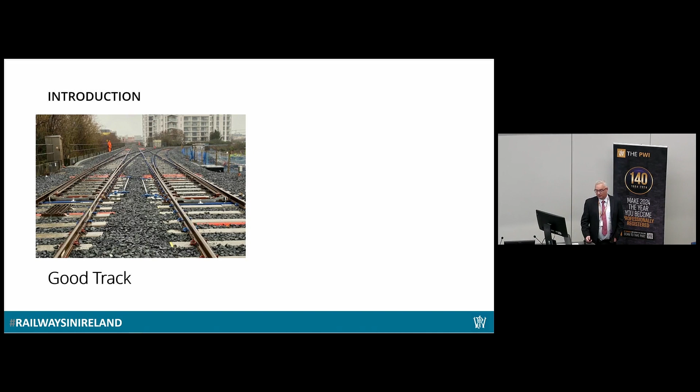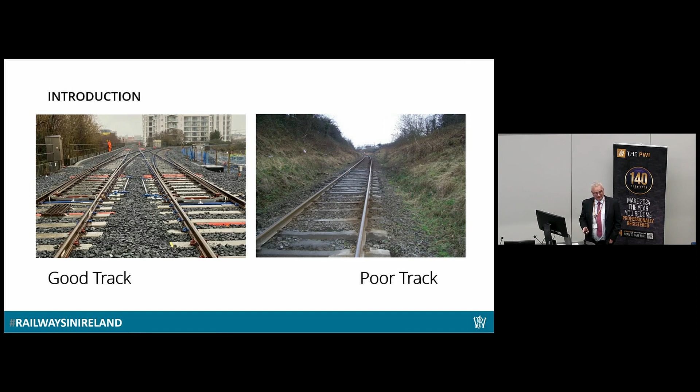Good track, brand new, all new materials, dug out, high specification. In terms of determining quality, that's easy. And at the other end of the scale, you've got poor track, at the end of its lifespan, wet beds, maintenance problems, speed restrictions on. Again, that's easy, we know when we got to that. But it starts off good and it ends up bad. And what we're trying to assess is the deterioration in between.

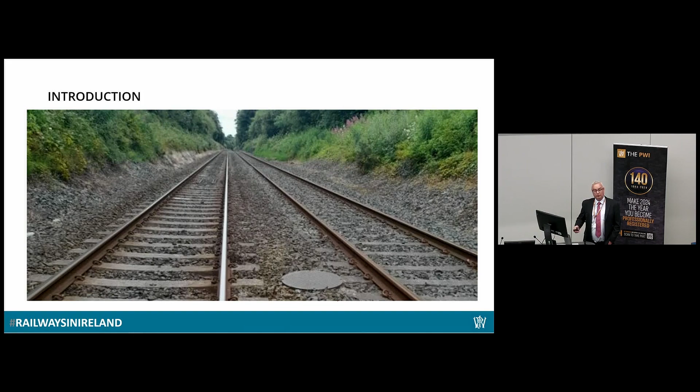This photograph is a piece of track that's doing reasonably well. It's no speed restrictions, no real issues, but how do we make sure that gets fixed before it becomes bad track? For an organisation who's planning into the future, getting the right funding, planning workloads, we have to know what we've got coming, not next year or 2 years, 3, 5, 10 years ahead of ourselves.

So just a little bit in the NIR. We've been quite lucky. We've now got our network all to CWR on concrete sleepers. Performance-wise, we're doing okay. There's no track condition speed restrictions out there at the minute. Delay minutes are very, very low. I think it was only about 1 or 2% last year, caused by track condition. So I think the case is we're doing reasonably well.

And how do we keep going like that? Historically, the last 25 years or so is about the time I've been here. We've been very fortunate in the funding coming in to get us high-quality renewals. And when I say formation treatments, ballast, replaced and drainage included to get the high spec. Prior to that, it was more focused on getting rails and sleepers in. So with 25% on the high spec, with 75% just not so high on the supporting works underneath. And traditionally in Northern Ireland, track had to get to a poor condition before we got the money to fix it. And what's looking forward is how do we stop that happening again?

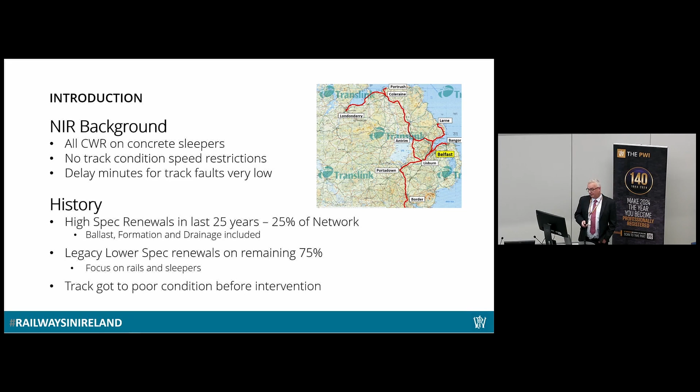So what's our challenge? We've talked today about the ambitious thoughts of the railway, what's going forward. We've got to ensure the ongoing performance of the railway, try to inform our decisions for the short, medium, and long-term planning, and have a think about what's the most appropriate solutions for our railway system.

And the output is we want to maximise the asset we've got, minimise the whole life cost, have a good idea of how we're going to inform remedial measures so we can form the long-term strategy which helps us to look at financial planning and workload planning.

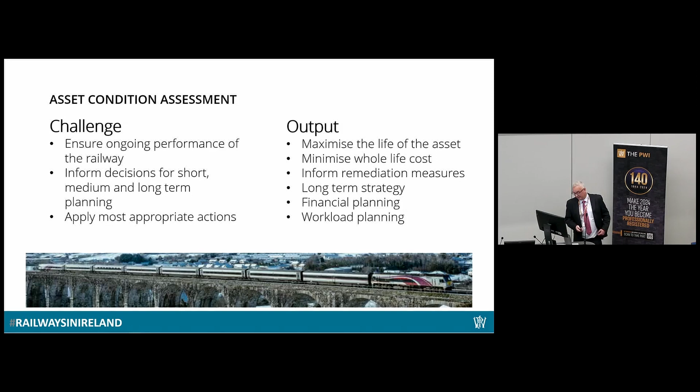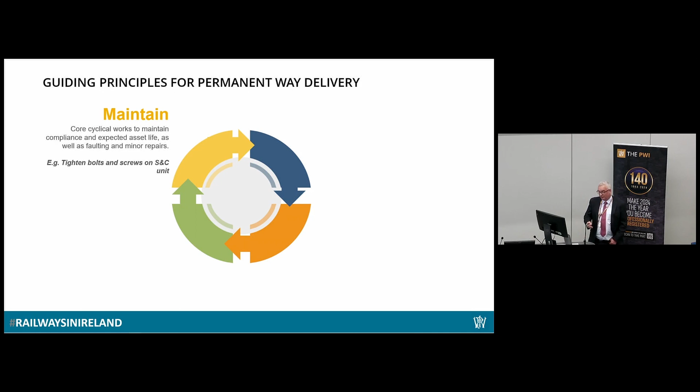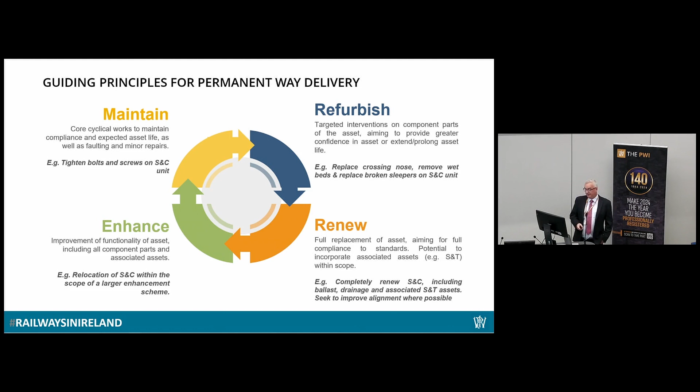Some of the guiding principles for the permanent way, we've got this wheel. Not rocket science here. You maintain your asset as best you can to maximise its life. Do the simple core things to keep the asset performing as well as you can. When components start to fail, you fix them. Targeted replacement of components like crossing noses, insulated joints. At the other end, we do full-scale renewals when it won't work anymore. It's the bigger impact due to high spec, meet all the standards. And then there's the enhancements to get into higher speeds and that type of additional capacity on the line, more trains.

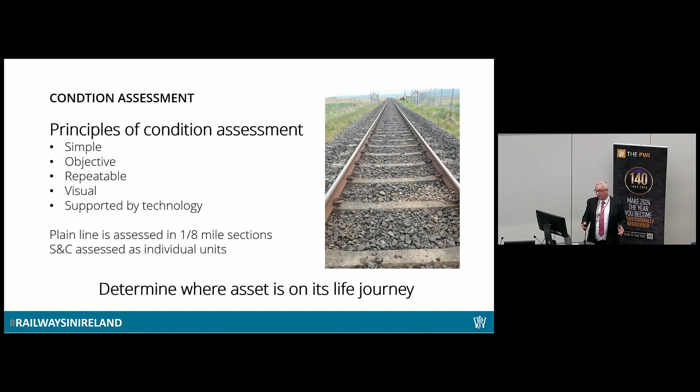Our principles, look, I'm going to say we're going to try and keep it very simple. We want to put the condition elements back in the hands of the people who are out there on our railway every day, the inspectors and the people who are out on the ground. Simple, objective, repeatable, a lot on the visual. Back to the fundamentals of visual, looking at things, and we'll bring in technology as we need it. We break our line down into 8th-mile sections like a lot of people do, and we assess S&C individually.

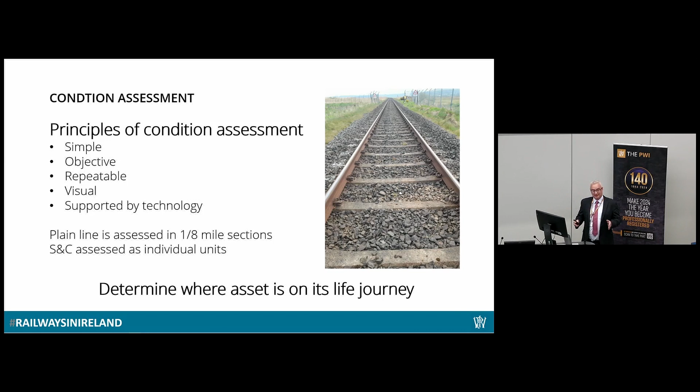The key is to determine where our asset is on that journey, from the first photographs, from the really good to the really poor. The really good and really poor is easy—it's the in-betweens that cause us the difficulty.

So one is to determine where that asset is. Break it into components, no rocket science here. Start at the top, work our way down. How's our rails doing, our sleepers, our ballast, formation, drainage? Don't forget the geometry. And then there's physical features in the line which impact how it performs.

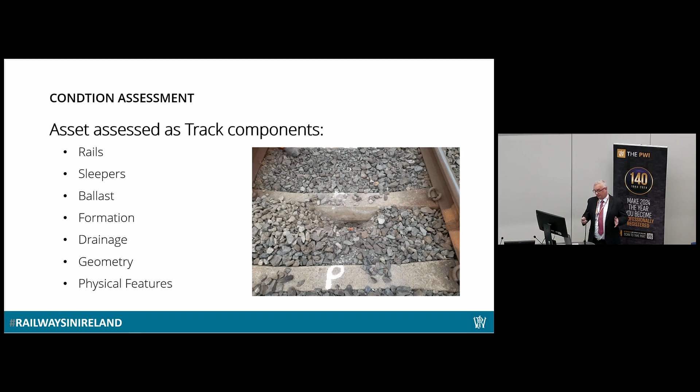Just going to talk about more practical aspects of condition ratings. So we designed these—they had to be simple, visual, standardised and objective. We designed a series of guidance documents to aid the user in making decisions on condition rating.

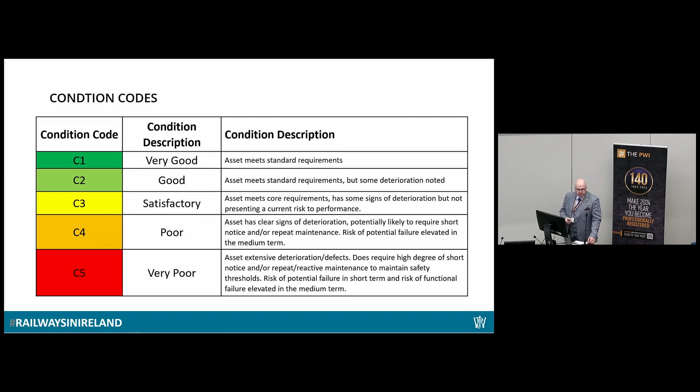So we used the sliding scale, as you can see there, from C1 being very good through to C5 being very poor. As Andrew alluded to, C1 and C5, very good and very poor, are easy—you can spot it straight away. It's the journey in between, from good through to satisfactory to poor, that maybe opens a bit more subjectivity. So this is what we're hoping these documents eliminate.

So we're going to just talk about one of the key assets we have, which is ballast, in a bit more detail, and then I'll do a quick summary after of sleepers.

So you can see C1, which is very good condition. The ballast looks very good, it's easy to score. It does everything it should do within the standards—looks brand new, sharp and angular, good profile, free draining. Fulfills all its needs in providing support and stability to the track and gives excellent results to the maintainer.

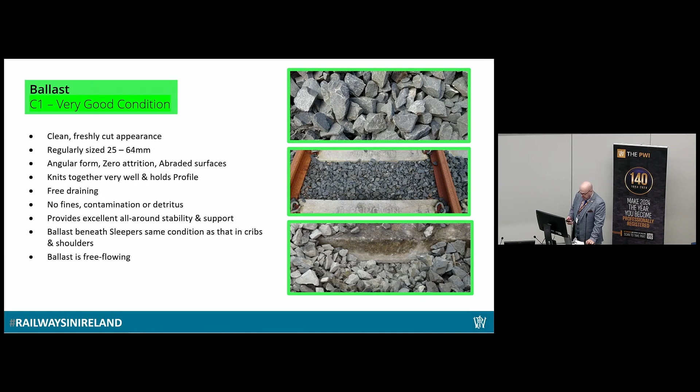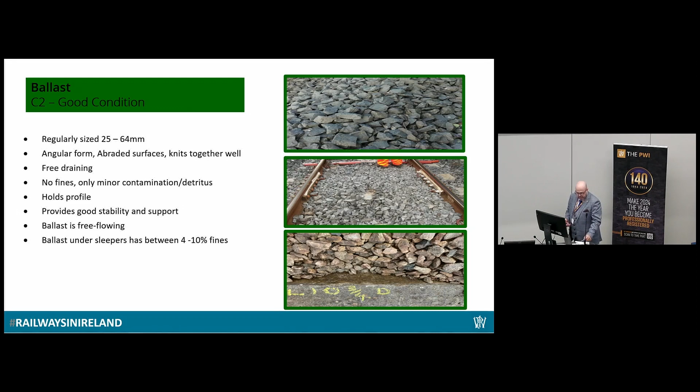So we move on through to good condition. Not a lot of difference between it, in practical terms, and the very good condition—it just looks a little more aged, a little bit older. But as you can see, there is some degradation creeping in. Beneath the sleepers we start to see an increase in fines of between 4 and 10% approximately.

Moving on into sort of midway along the journey, into C3, satisfactory condition. It's not very good or very poor, a little more difficult to score and assess. But we now see the first visual signs of degradation—moss, evidence of vegetation on the surface layer, fragmentation of the ballast pieces, just minor at this stage, water retention between the ballast pieces. Signs of voiding as well, possibly, with the telltale signs, the white patches you can see in the distance.

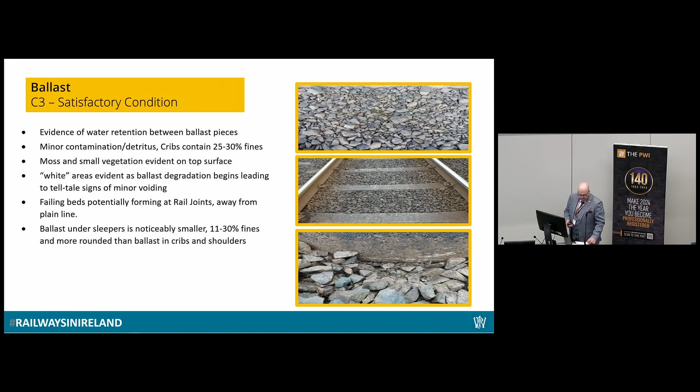Now you see an increase in the fines beneath the sleepers as well, somewhere in the region of 11 to 30%. And now within the cribs as well, you're starting to see contamination, fines and detritus to the volume of around 25–30%. But it still provides good results to the maintainer, albeit there's some reduction in the durability.

So moving on into poor. At this stage, ballast pieces are fragmented due to the repeated loading of the rolling stock and possibly from the voiding and pumping action of the trains. Repeated maintenance interventions, like tamping, are going to increase the fines and stuff. The research I've done on this shows that each tamping cycle per sleeper can generate somewhere in the region of 2.5 to 4 kilos of fines, so you can see how that has a knock-on effect over the years.

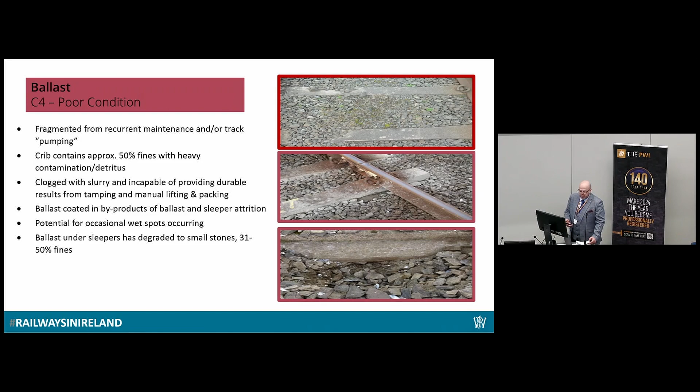So the ballast at this stage has become clogged with slurry. The water retention is leading to a more exponential degradation of the asset because it can't get the water away, and the track support and stability are greatly diminished. You now see an increase of fines beneath the sleeper to about 31–50%, and about 50% of the content of the cribs as well.

Very poor—we have very little of this, if any. You can score that straight away just by looking at the pictures. There's more fines and slurry than there is useful ballast within each of the cribs or within the whole track bed. And you've now got the development and propagation of wet beds, so everything's going to be standing when the weather's not in your favour—standing water clogged up through the ballast and the ballast shoulders.

So nothing's free draining anymore. No durable results to be gained from any mechanical or manual maintenance activities because the ballast is no longer able to flow. So the knock-on effect of this degradation is going to have an impact upon your sleepers and their formation. Anything above and below it's going to suffer as well. The only real remedy to this is full excavation and reballasting.

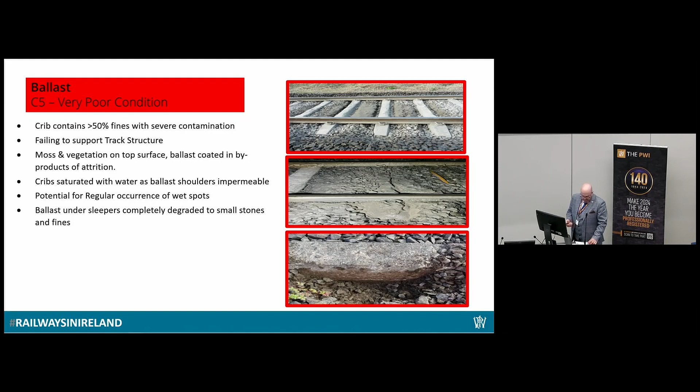Moving on to wet beds. Wet beds can be viewed as a key indicator of the condition of your ballast as it reaches the end of its life. So in addition to the outlined methods I've just showed you about scoring ballast, we also consider the number of wet beds we would have per eighth of a mile, and that's overlaid to give us a picture of the overall ballast condition within an eighth.

So to build a history of the long-term condition of ballast in a section, we would keep a good record of the number of wet beds we've treated locally. That data can highlight higher wet bed recurrence, or where past removal hasn't proved the expected longevity we had hoped for. Recurrent localised wet beds could be an indicator that a site's key for a heavier intervention or just localised repair - for example, ballast cleaning.

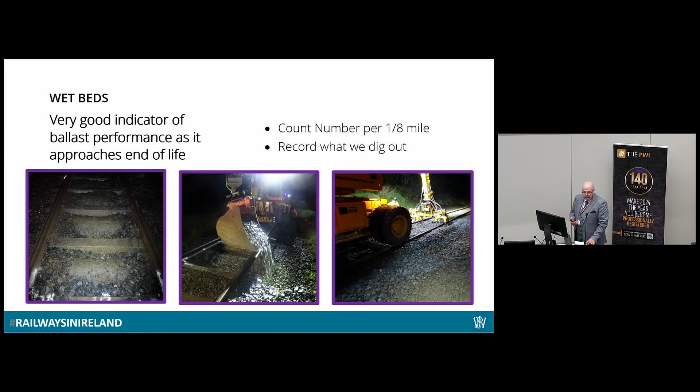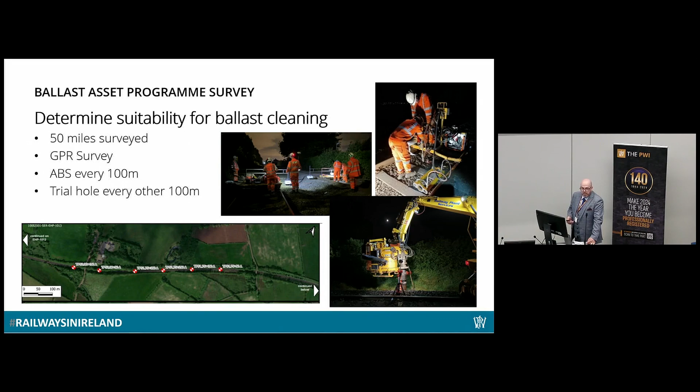Sometimes we need a bit more than a visual condition assessment. You need a bit of scientific data to back things up that you're seeing visually on the ground. That's when Translink then brought along the Ballast Asset Programme survey, which backed up the results of the visual assessments with a bit more tech. The surveys covered about 50 track miles using ground penetrating radar, and also used automatic ballast sampling and test holes at alternate 100-metre intervals.

That detailed survey produced very specific data sets and gave information on the depth and the current condition of the existing ballast, similarly to other layers within the subgrade. Grading curve analysis at each test hole also provided data to establish the size and quantity of the existing ballast and the volume of fines, to determine potential return rates, for example, when we go to do ballast cleaning.

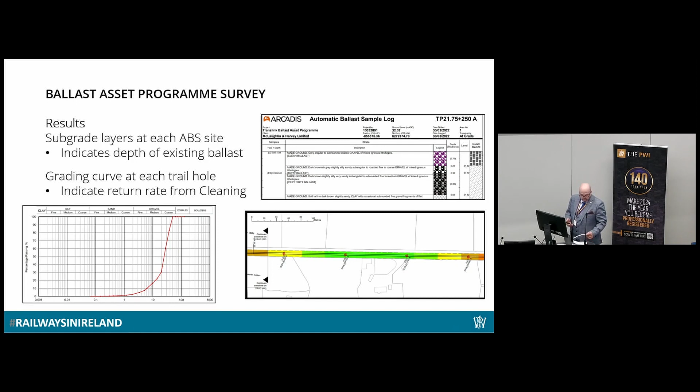Moving on to concrete sleepers, I'll just do a quick summary of the condition rating for concrete sleepers - a vital asset within the track. They're also a very good example in relation to condition rating, that condition rules over age. You can have concrete sleepers in the track for decades, and they're still performing well and still in very good condition.

So a quick video just to take you through the journey, from very good through to very poor. Very good sleepers are easy to score - they look good, they're fresh, clean concrete. But as they degrade you might see some dulling of the crisp outer edges of the sleepers, and a bit of rounding maybe occurs in the soffit areas and the undersides from loading and from tamping, Kango packing and things like that.

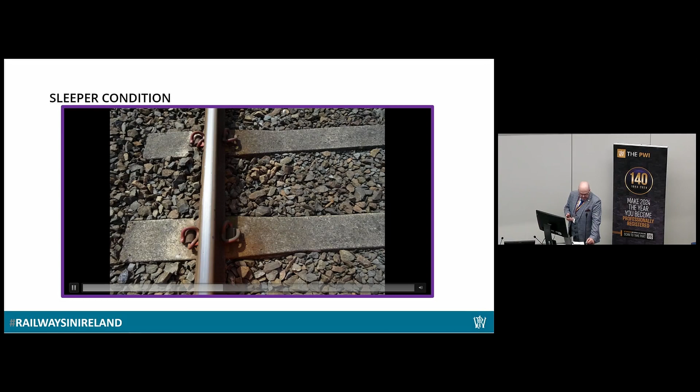Moving on to the satisfactory condition, you can encounter some minor gall and abrasion in the rail seat, to a maximum of 1 millimetre, but with evidence of centre cracking in the sleepers to a maximum of 1 millimetre. It still maintains gauge and is capable of supporting the rail.

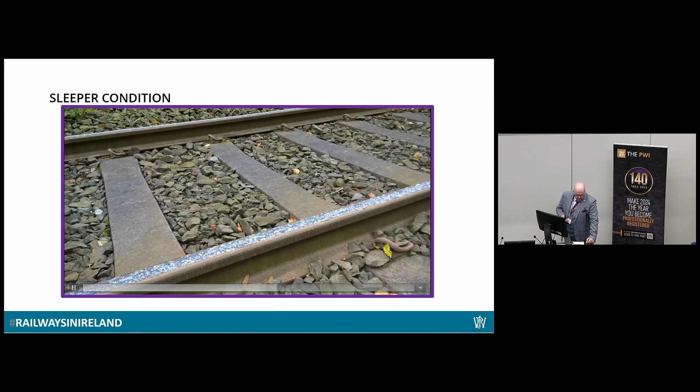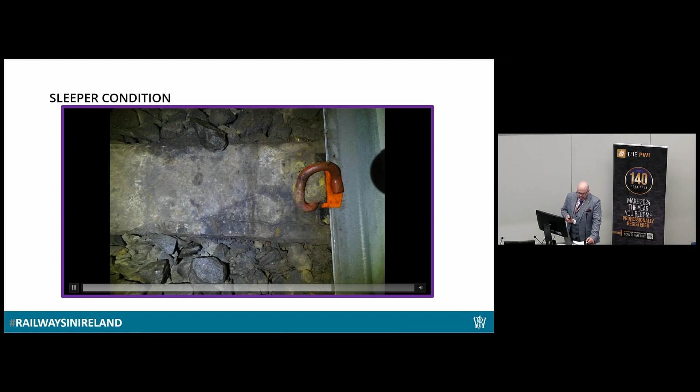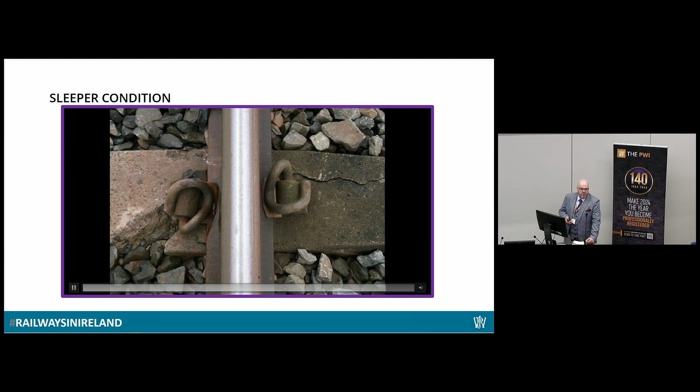At poor condition, you might have cracks up to 1 mil in the rail seat, and centre cracks now between 1 and 3 mil, but a maximum of 3 per sleeper. At very poor condition, there'll be larger cracks in the rail seat, possible exposure of the reinforcing tendons, and defective housings as well. The sleepers are moving toward becoming ineffective, and at this stage they'll already be in the plan to be removed and replaced.

As part of the ballast condition and sleeper condition ratings, we did a little survey on the Londonderry line. This is a bit of a case study on what we did, but first some background to the section of track surveyed. This was relaid in the mid-1970s with 50 kilo flat bottom rail, jointed on concrete sleepers. There was no ballast or drainage or formation works done as part of this - it was just concrete sleepers laid on top of the old ballast that had been designed for timbers and jointed track.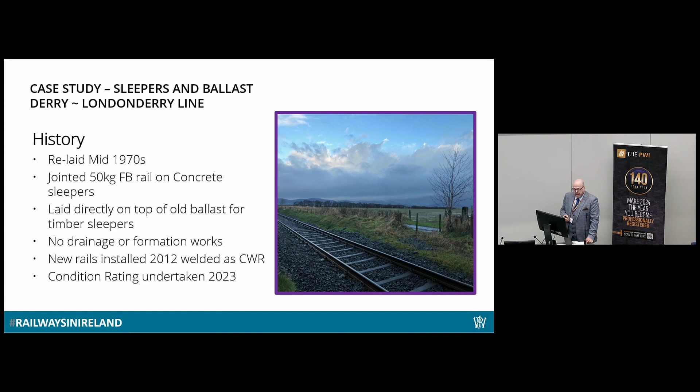Then in 2012 it was re-railed with continuous welded rail, and in 2023 we undertook this condition rating survey. As part of the survey, we excavated test holes at about every three quarter mile interval to a depth of about 200 mil below the bottom of the sleeper.

What we did notice consistently is that if the ballast scored, for example, good or satisfactory on the surface, when you get down to 200 mil below the sleeper, it was almost consistently at least one score worse than that. So what had happened over the years, frequent ballast top-ups created a cosmetic layer that gave the impression your ballast on the surface looked good, but in reality, when you get down into the working part of the ballast, it was actually very, very different.

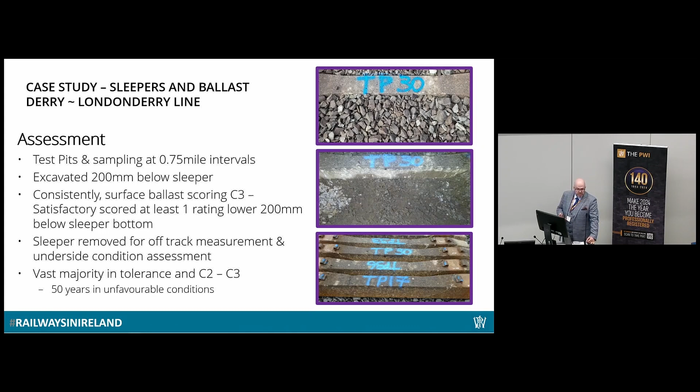The vast majority of sleepers that we took out as part of this sampling exercise proved to be in the good to satisfactory condition rating. So even after 50 years in less than favourable conditions, they were still performing well and still in fairly good condition.

Can't talk about condition rating without covering rail. Rail could prove difficult to condition rate. It's a massive linear asset, with many facets to scoring it. Non-destructive testing provides the majority of our data to inform rail condition.

So we're talking eddy current and ultrasonics. Mostly they're going to identify the likes of your squats, your rolling contact fatigue, and the list can go on and on. We broadly categorise the defects into two camps: actionable defects and non-actionable defects. Minimum action codes, or MAC codes, will define the severity of the defects. So the number and the severity of these are plotted onto swim lanes, which Andrew's going to cover in a moment or two when he takes over again. And then that'll dictate the condition rating for that 1/8 of a mile.

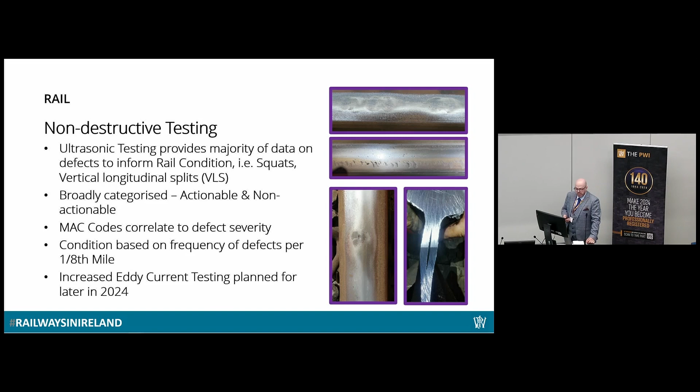Later on in 2024, to further enhance the data that we have to inform us of the condition of a rail, we're going to have an increased campaign of eddy current testing. Whilst NDT is an excellent tool in any railway's management of rail defects, there's always going to be a requirement for some visual inspections as well, to detect flaws that can prove elusive sometimes to ultrasonic testing methodology.

Typical defects which prove difficult to detect with ultrasonic testing are mostly associated with the foot of the rail, primarily to do with loss of section, corrosion, or both. Other wear-associated defects, like plastic flow, rail end batter, side wear, head wear, mightn't be picked up through non-visual assessment as well, such as the ultrasonics. So it's key that we know where these are to score the condition of the rail.

Other issues that could cause potential concerns are SMW welds. For those of you that don't know, it's the older type of weld, harking back to about the 70s. There's less process and quality controls at the manufacturing stage and even in installation. They're difficult to ultrasonically test as well, as there's a very wide weld collar on them, which can lead to difficulties when they're being tested. So knowing where you have those will impact upon the condition of your rail. If we have those within an 1/8 mile section, that will bring the condition rating down.

Ingot rolled rails as well — if they're within an 1/8 of a mile, they'll also score that condition rating down a little bit. Because of the methodology and the manufacture of them, they're more prone to manufacturing defects like VLS, the vertical longitudinal splitting, as opposed to the more modern concast rails, which don't have those problems. So if there's VLS, it's important that you know where it is to manage it correctly, but also so you can put it under the swim lanes to inform you of the condition of your rail within that 1/8.

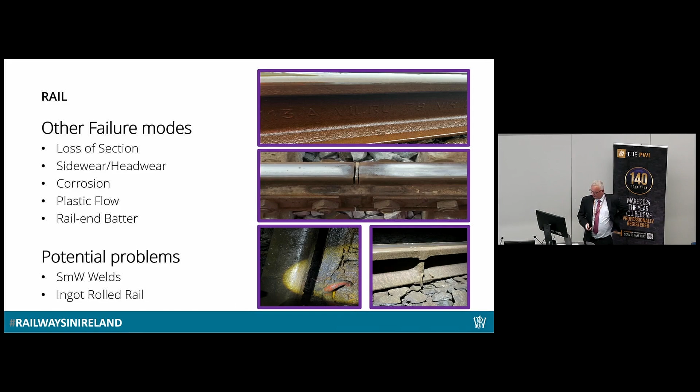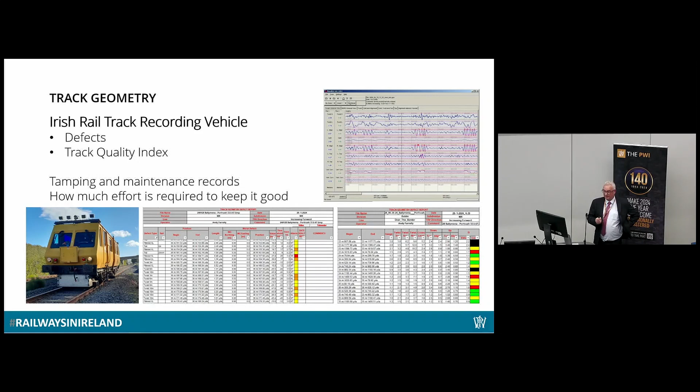So we've talked about sleepers, rails, ballast, some of the key components of a rail. I'm going to talk about a few other things. You can't really talk about condition of your rail without talking about track geometry. I've left it deliberately to this stage because most people think of it as first and foremost. But you have to know how your track is performing, and I have to say a big shout out to our friends in Irish Rail who have given us back the EM50 after many years of exile. It's back in the north again. It's nearly the age of me and still doing quite well.

Track recording tells you what your defects are and gives you something to fix. I'm not talking about the minute we fix those, that's just general rule. The quality index we get, the standard deviation type data, allows us to look at where our track is and how it's performing over time.

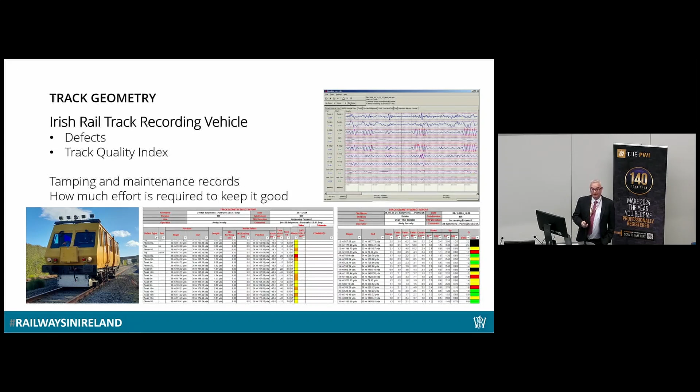It's not just a single snapshot. We all know this. How much effort are you putting in to keep it that way? If you've just been told it looks good, that doesn't mean it is good. So we have to understand what we're doing. But without that good data, you're in a tough place, other than subjective opinion - I think it's bad, I think it's good. So yes, we're very glad to see the EM50 back in the north.

Drainage. I don't know about everybody else in this room, but as a track engineer, sometimes we can get carried away with the rails and the sleepers and the big yellow plant and all the fancy trains. And drainage - it's in every textbook. Get the water away and you'll be okay.

As I was putting this together, I came up with the notion that drainage is a bit like healthy eating and exercise. You know you should do it, you know it'll do you good, but you might not get that quick hit return. It's going to take years and years and years.

And we have definitely been guilty. I did say at the start, the last 25 years we've done well getting good quality track renewals done - like 25% of the network done. A lot of it is legacy, but one of the points I want to make is the people who built the railway didn't just come down with the last shower. They knew you have to get the water away or a track won't perform.

And I hope it's not just us. I think we're all a little bit guilty of forgetting about it. It's hard to do - it's not very glamorous, boring, difficult work. And it can fall below the radar for a lot of us.

The point I want to make is we have a poor record with our existing tracks of getting the drains fixed. A lot of times it does okay, it sits there okay, we're grand. But when it fails, and it's in that progression to failure, it's not doing so well - you get the flooding, fair enough, it just can't cope at the time.

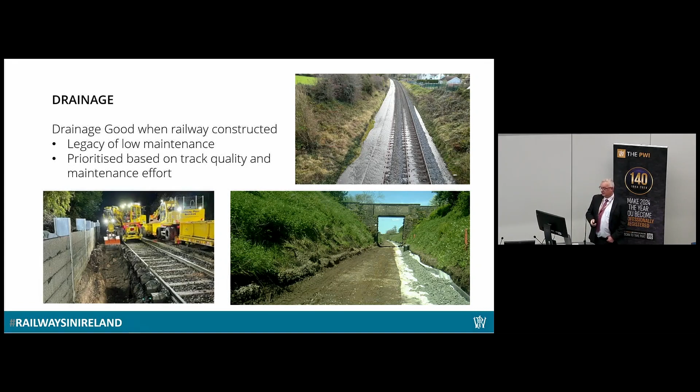Using information on wet bed formation, track quality, and all the various other things, we can home in on where the formation might be giving us trouble and target those for high spec - deal with the soft spots, get your design properly done, site investigations, etc., and put the drainage in. That will bring you long-term benefits. It's really, really expensive to do - high input, high output. If you get it right, you've got a really good railway line. We've been lucky the last 25 years with that type of renewals, but that's 25% of our network - we've got the rest of it to do and keep right.

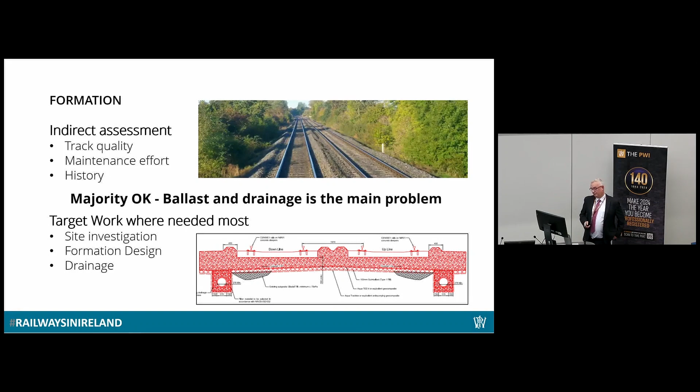So targeting where we need to do the formation work. On our network, I often think in our little part of the world, if you've got blue sky above you and nothing to stop you, you can generally tamp yourself out of trouble. But there are areas where this doesn't work. Over bridges, obviously you get clearance issues - they're usually in a cutting, and at the bottom of the cutting all your drainage issues just multiply up, and you can't tamp yourself out of trouble.

So over bridges were identified as an area - again, I think everybody in the room who does track work knows this. Level crossings - they're just more difficult to get at, and you have to close the road, resurface the road, do various things like that. They tend to be areas that give trouble, plus you get all the extra dirt and whatnot coming from the road and the road traffic. Platforms - not so bad.

Generally trains are going slower through the platforms and don't get as much abuse, but the good quality of installation means you can keep up with the tolerances required for step and distances. And with S&C, we all know discontinuities occur - no matter how good you think they are, they always get a lower quality index. So you've got to take S&C separately, but everybody knows that.

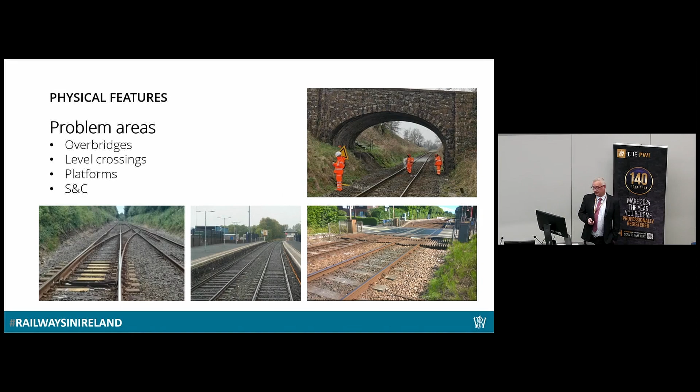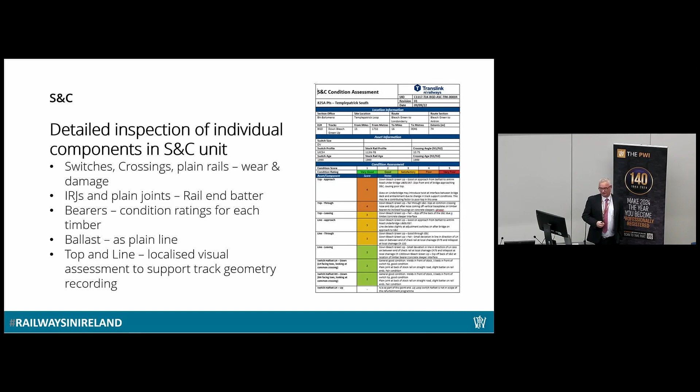I'll just talk about S&C quickly. We'll cover 8 miles for the plain line stuff, but we do S&C individually. We create a little sheet breaking all the components down for each unit - looking at the rails, the switches, all the elements, the joints, how well they're done. Particularly rail end batter has a big impact on how well your S&C will do after maintenance. We look at sleepers and give a condition rating for each one now on a full 1/8 of a mile.

Ballast is a bit like plain line. A lot of our older sleepers are timber, and there's much more forgiveness on the ballast than with concrete, so we don't typically get the wet spot generation and we get away with a lot more.

For top and line, we do a little visual assessment - I say put the power back into the people who are looking at it. Does this support what you see in the track recording vehicle? This gives us an idea of where S&C units sit.

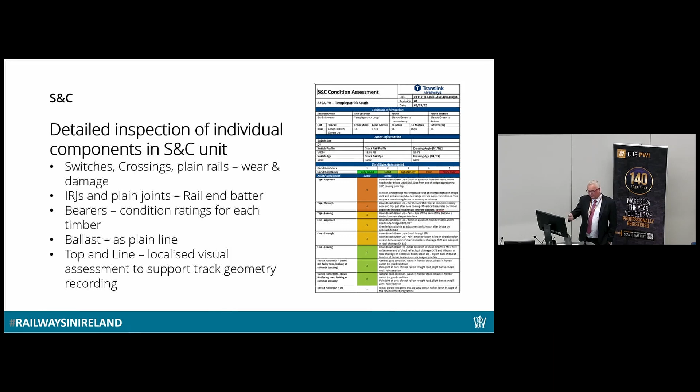What are our results? Very quickly, coming out on ballast conditions, we've got about 40% in the good to very good range, another 35% doing okay, and we're down to roughly a quarter in the poorer conditions.

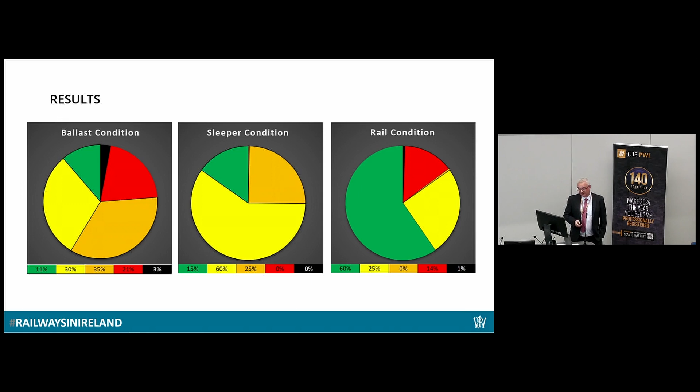Sleepers are all doing remarkably well - even some of our older 30, 40-year-olds are doing okay. And rails, we've got to a good place now, but there's still some to tackle.

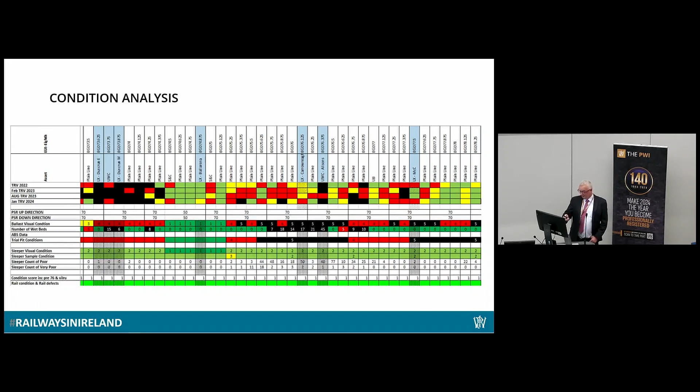Stevie mentioned this - we call it the swim lanes. We just put all this information together, quite simple at the minute. Spreadsheets, loading it all together across 8 miles, highlighting where your features are - all the different colours just jump out at you to give an overall impression of what's doing well and what's not. I'm not going to go into detail, but there's a lot in there on how we use it further down the line.

But ultimately, for all this, condition rating is well and good to have all the documentation, but what is it telling us, or where is it getting us to?

I suppose we're thinking about things like rail milling, which has been introduced in the last couple of years - Irish Rail were first to regenerate the rail and take away those head defects. Ballast cleaning is definitely an option NIR wants to actively pursue to sort the ballast out, especially when we've got good sleepers and rails doing okay. There's also the notion of retaining our sleepers - if they're still okay, let them stay there.

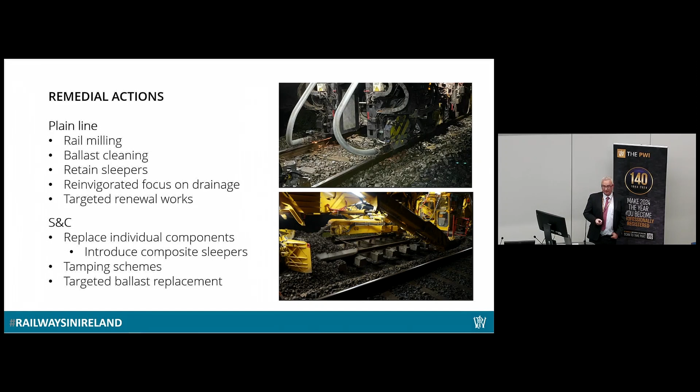I'm going to come back to drainage again - refocus our efforts there, target it where it's needed, and get the drainage working right, and I think the whole picture will pull together. Then there are areas where either the formation isn't right or we're having trouble at tight spots. For S&C, we try to enhance the life of individual components, taking them out and replacing them - and we're thinking of bringing in composite sleepers to replace the timbers. We'll do a tamping scheme to get the alignment right, and target a ballast replacement.

And then I come to the conclusion. We're trying to assess the spread in each category - good and very good is easy, very poor is easy, it's the bit in the middle that's tricky. Where are we on the journey? I suppose ultimately overall condition needs to come up so we never get to the very poor.

But I need to keep an eye on this over-engineering idea - we can do everything perfect and get the perfect railway, but we mightn't be able to afford it, or we might be able to deliver it, but we need to find out where we're going to balance the spend with the reward.

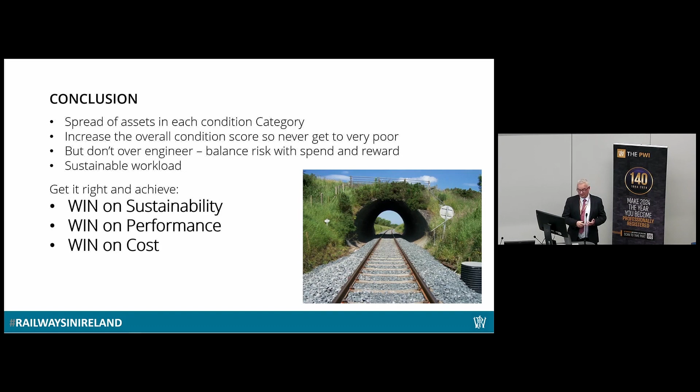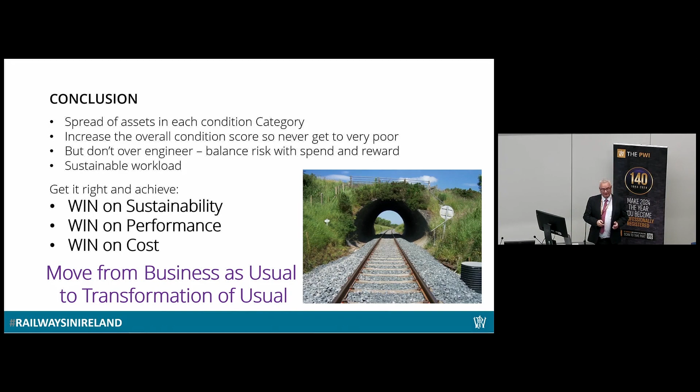And if we can do it right and get our workloads planned for the future, we've got a sustainable workload. Hopefully we get it right and we win on sustainability, performance and cost, which everybody likes to hear - nice sound bites. As a man in my department said, can we move from business as usual to transformation of usual? Tying it all back to performing today and preparing for tomorrow - things are going to be very different in 30 years than they are at the minute. Thank you very much, and we're not far off.